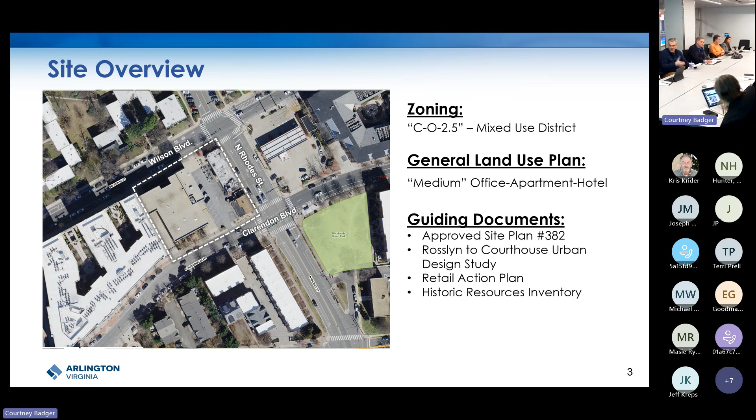Currently, the site is developed with an office building and 2 restaurants: Il Radicchio, in the bottom right-hand corner of the screen, and Roadside Grill, in the bottom left-hand corner. It's adjacent to a 6-story residential building. There's an alley that runs between that residential building and the office building that's proposed to remain, providing access to an underground parking garage and loading areas, which are also proposed to remain and provide support for the proposed building.

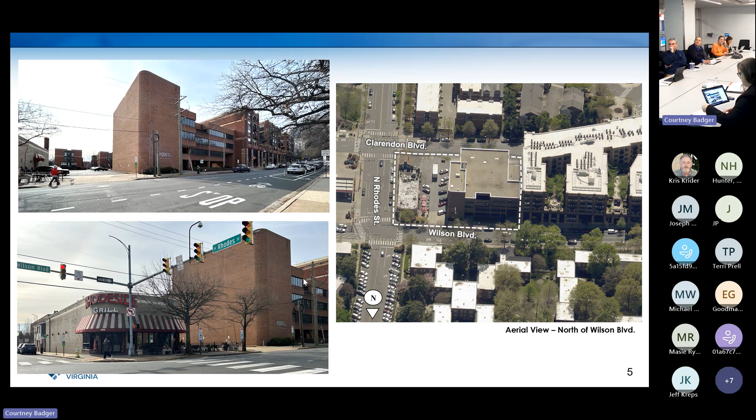This site is within the Rosslyn to Courthouse Urban Design Study area, which is the guiding planning policy document for the site, and I'll reference it throughout the presentation. Roadside Grill and Il Radicchio restaurants are listed on the county's historic resource inventory as notable and minor, respectively.

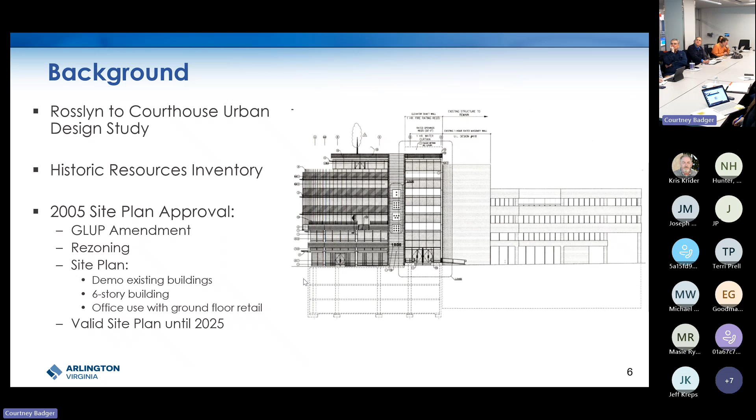In 2005, the county board approved a GLUP amendment and rezoning site plan to redevelop this site, seen in elevation here, with a 6-story office building, which included the demolition of Roadside Grill and Il Radicchio restaurants. That site plan approval is still valid. If the proposal that we talk about tonight is approved, it would supersede that site plan approval.

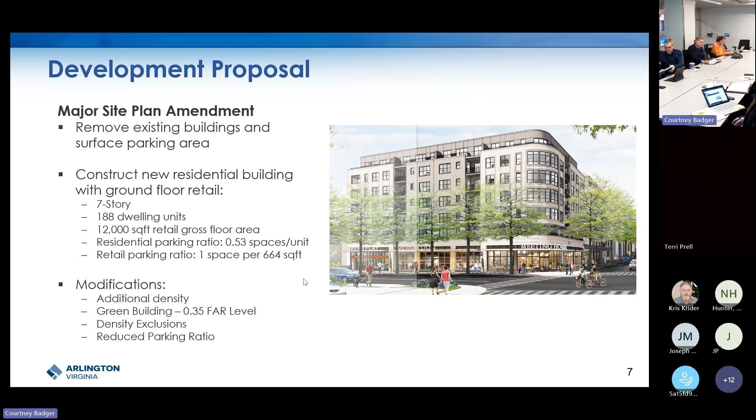So the applicant is proposing to amend that site plan to demo the 3 buildings on the site and construct a new 7-story residential building containing 188 residential units and approximately 12,000 square feet of retail gross floor area on the ground floor.

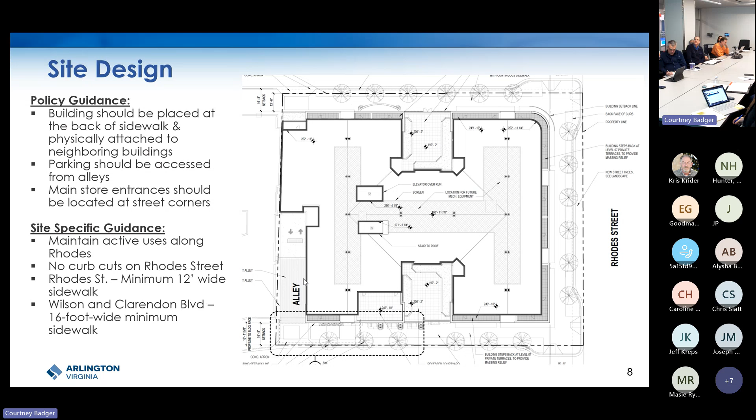It has a protected pedestrian walkway, which is called for in the design study. Active uses line Rhodes Street with retail and retail-equivalent uses along Wilson and Clarendon Boulevards, in line with the Arlington Retail Action Plan. There's entrances at the corners of the buildings, which is specifically called for in the urban design study.

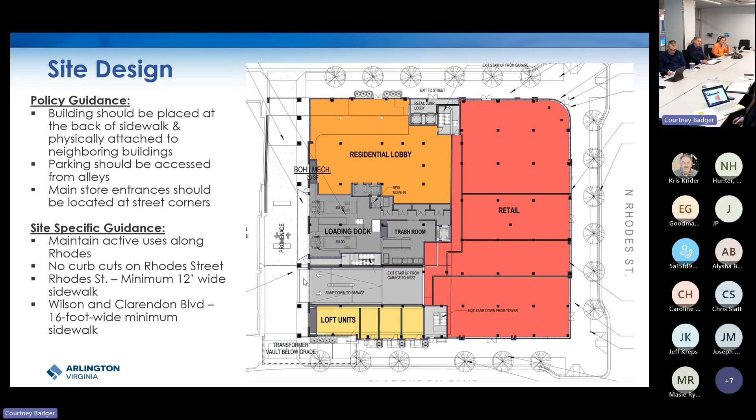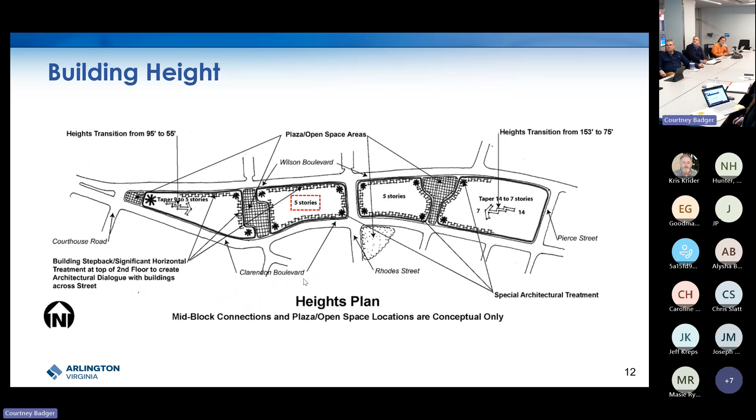The Rosslyn to Courthouse Urban Design Study also has height recommendations for this corridor. This block and the block to the east are identified to have a recommended height of 5 stories. The current approval active on the site allows for a 6-story height, and the applicant's proposal now requests a 7-story height. So although the urban design study recommends 5-story height, the zoning district allows up to 16 stories.

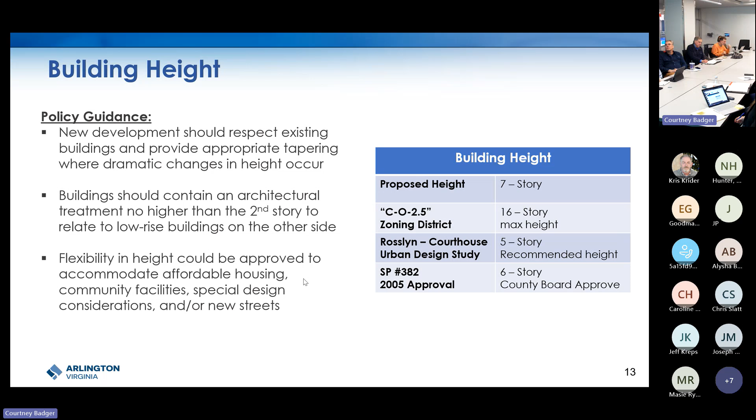Additionally, the urban design study states that buildings should respect existing buildings and provide an architectural treatment at the 2nd floor to relate to adjacent buildings. It does specifically call out that height flexibility is available, particularly for projects that have affordable housing, community facilities, or other special design considerations.

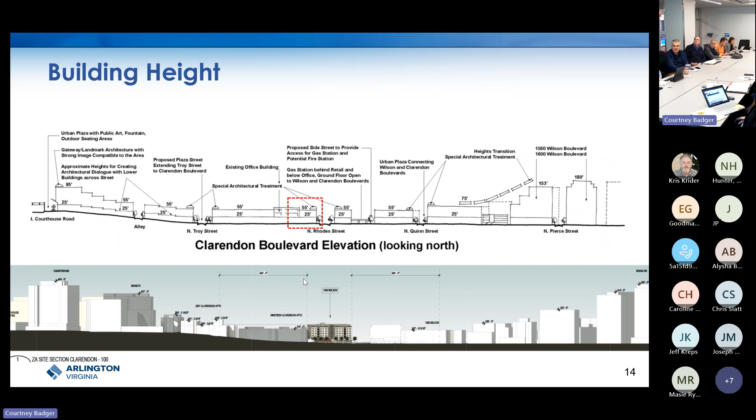Here's another view of that height profile outlined in the plan. The urban design study envisions, for lack of a better term, a bowl-like elevation, where the higher heights are on the east and west of this section, then it tapers down to the bottom of the bowl, which would be this site and the block to the east, being the lowest elevation. In the bottom view, you can see how the applicant's proposal falls into that view—this is looking at Clarendon, looking at the site.

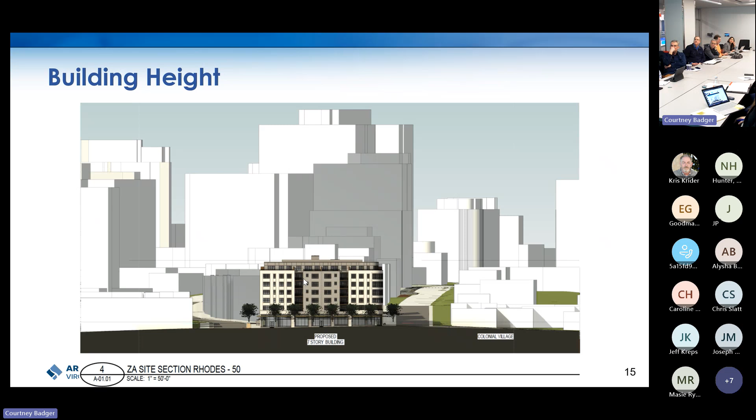And here's a proposed development look from Rhodes Street, looking from North Rhodes Street at the site. You have Colonial Village on the right-hand side, and the Brompton on the left.

I'll talk briefly here, though the applicant will go into more depth on the architecture. You can see some renderings. The urban design study recommends an architectural feature on the corner, and the applicant is proposing a rounded corner to fulfill that and pay homage to the Rhodeside Grill. They also have a carve out at the 2nd floor and courtyards on Wilson Boulevard and Clarendon Boulevard to break up the massing of the building.

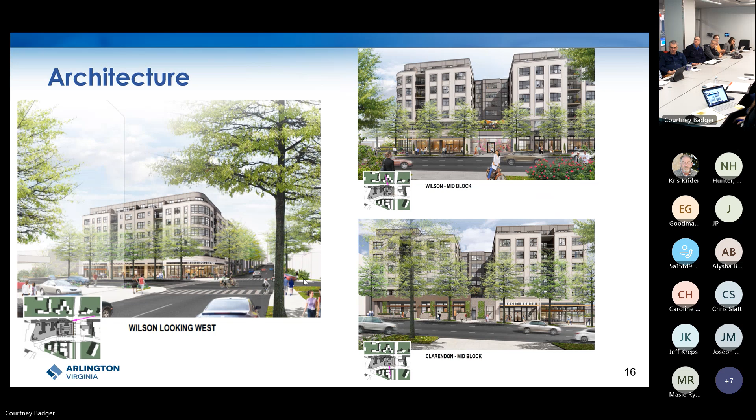Just a couple numbers on landscaping: the proposed tree canopy is 16% coverage. The 5 trees currently on site are proposed to be replaced with 18 new street trees along Wilson and Clarendon, and 15 other trees are proposed to be planted at the 2nd floor courtyards on both the Wilson and Clarendon sides.

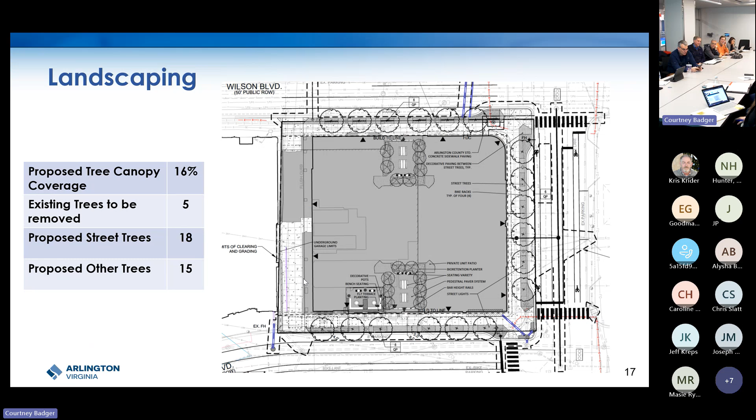To give an overview of where we're at in the process, we're at the first SPRC meeting. There'll be a second SPRC meeting in April before we go to commission meetings, including Transportation, Planning Commission, and possibly Housing Commission, and then on to the county board. So with that, I'll stop my presentation and we'll hear another presentation.

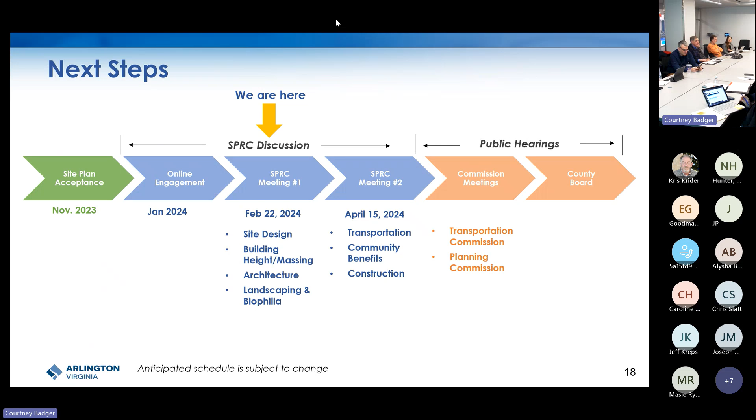My name is Andrew Painter with Walsh Colucci, good seeing you all here this evening and online. I'd like to provide a brief overview, then turn it over to George Chapisky, managing principal at Fortis, for introductory remarks from his company's perspective. Then Alysha and Jeff Kreps will walk through the architecture and the biophilic elements of the project.

This site was originally approved back in 2005, as Courtney mentioned, to serve as a new headquarters for the National Science Teaching Association. We all know what has happened to the office market since then, and NSTA's office needs have clearly decreased—the organization no longer needs a new headquarters building. Fortis purchased the site outright last year and immediately began thinking about a new vision for the property.

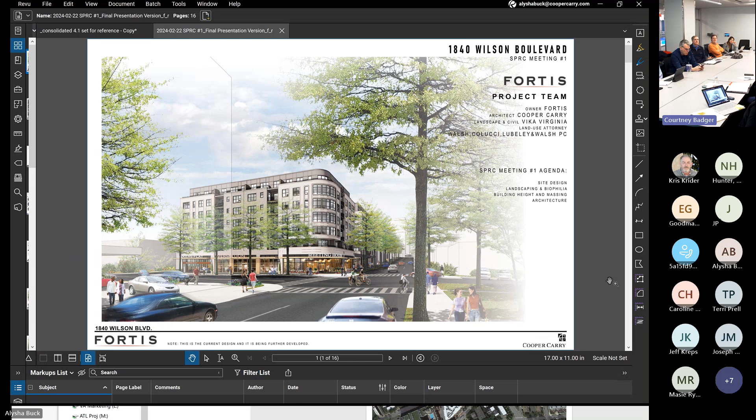Over the last 10 months or so, we've developed design drivers for this, which will come out in Alysha's presentation and our discussion. The first design driver was to increase the county's housing supply, especially between Wilson Boulevard and Clarendon Boulevard, recognizing that it's a transit-rich environment.

The second design driver is to complete the urban design intent of the county's policies in terms of streetscape and architecture on the site. The third is to deliver ground floor retail and restaurant opportunities that were approved and originally envisioned with the 2005 approval—and the Rosslyn Courthouse Urban Design Study really calls for this to be an activity center and social node. Last but not least is to create a physical meeting place between the Courthouse and Rosslyn neighborhoods.

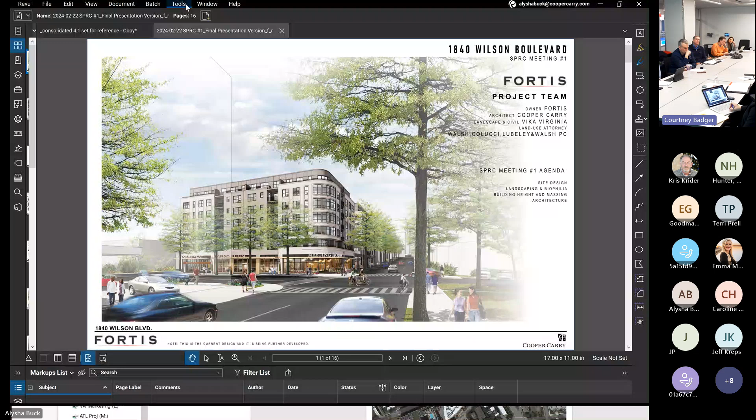This is sort of in a trough, but we're equidistant between the two metro stations and between the two neighborhoods. We filed our application back in May of 2023, and as Courtney mentioned, we were accepted for processing formally in November of 2023. Before filing, though, we went through a conceptual site plan—something the county offers to get an early read on things like land use, transportation, setting the ground plane, and policies.

Several staff members here tonight and online participated in that, and it was a very beneficial process for what we eventually filed, setting clear expectations for a variety of things—we're very grateful for that. We've had a couple of meetings with Rayfom, met with representatives of the Colonial Village community, and reached out to meet with the Bromptons as well. We're happy to see representatives of our neighbors here tonight too.

So George—yeah, thank you, Andrew. Again, my name is George Chapipsky. I'm president of Fortis Companies, an investment development company focused on projects throughout the DMV. We've currently got a project over at Potomac Yard that we're completing, 140 units.

We have another project we're taking through the 4.1 here in Arlington, just a couple of blocks away on Fairfax Drive. We've got another one we're finishing up down at the ballpark across from National Stadium. This site is obviously an important corner. It's been long underutilized, and I feel like we brought together an exciting team here to help realize this block.

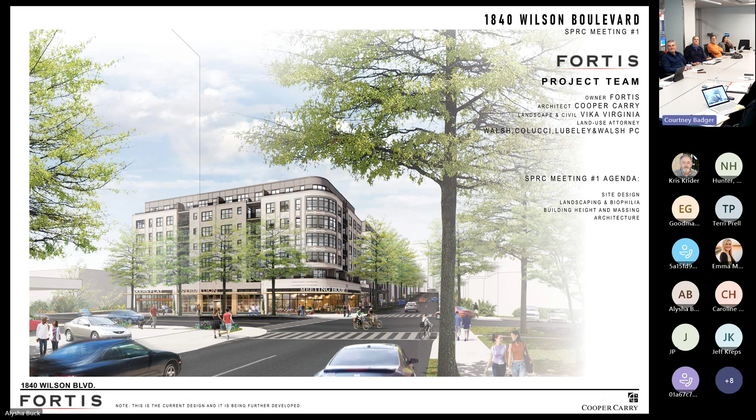Alright, so I'm Alysha Buck, an associate principal with Cooper Carry. We are the architects on the job, and I will be the project manager for the project moving forward. So I don't want to be too redundant to what Courtney spoke to earlier, and I know we're on a pretty concise timeline here today. Let's dive right in.

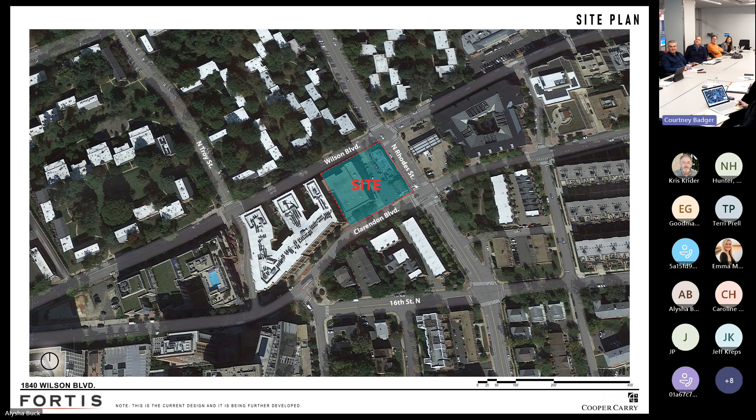We're already refamiliarized with the site right between the courthouse neighborhood and the Rosslyn neighborhood. Looking at the site design, there were several high priority items. Number one, providing active uses along all three sides, all three street fronts. You can see at the top left our residential lobby, a good segment of retail that wraps both corners along Rhodes Street, and then the loft units down at the bottom left.

Another high priority in the site design is improving the pedestrian environment. The first move we've made is reducing the number of vehicular curb cuts out there today. There are 5 curb cuts, and we're taking that down to 2, streamlining vehicular access but also providing continuous sidewalks along Rhodes and Clarendon, which is a big improvement over conditions today. In addition, we're widening all the sidewalks, providing 16 feet 8 on all 3 sides, and introducing new street trees for a continuous green environment around the site.

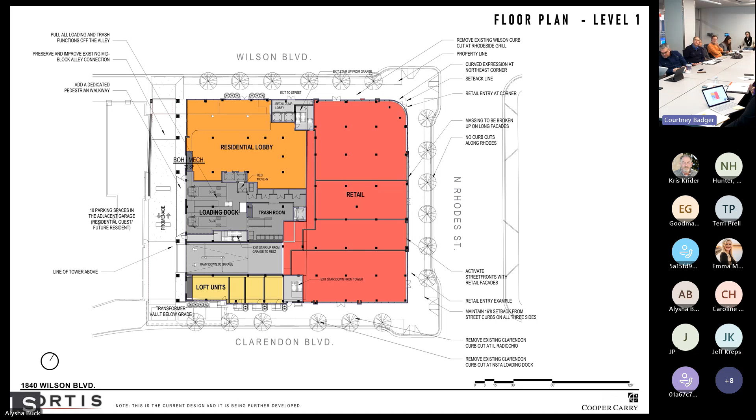Our final high priority item at the site design level is improving vehicular traffic. We're maintaining the existing alley, which gives access down into the existing below grade garage. We're preserving that below grade garage - I think that's important both from a sustainability aspect and for improving the timeline for construction. That's going to save us a good chunk of time in the building. Additionally, off of the alley we have all our back of house function for vehicles. You can see right in the middle of the building we have our loading dock and trash. Trucks will be able to pull not only off the street but fully off the alley and into the footprint of the building, totally out of the way, leaving the surrounding areas free for vehicular traffic.

And now I'll hand it off quickly to Jeff Kreps with VIKA to speak to biophilia.

Thanks, Alysha. This is Jeff Kreps, I'm the Director of Landscape Architecture at VIKA, and I'm here representing both the civil engineering and landscape architecture components. Briefly, I just want to talk about the biophilic elements as defined in the upper left-hand corner, so we're all on the same page. Biophilia is the innate tendency for humans to want to be closer to natural elements. So on this urban site, our goal is to introduce, to the extent that we can, those natural elements.

Primarily we're talking about the ground plane for the public, right? That's the piece you're going to be seeing, but also for the residents of the building who will be interacting with the courtyards up above, the two primary ones you see, as well as the amenity terrace on the upper level. So briefly, we are exceeding the canopy goals for the site with the trees we're putting in, and we are exceeding the tree replacement requirement, which is a good thing and it's a challenge.

We want the street trees to be the primary component of the ground plane, providing an edge, both a physical and a visual barrier between those folks on the sidewalk and the automobile traffic passing by in the street. It helps soften that edge. It also, at maturity, provides an overhead plane via the canopy, which can help again soften the urban edge and make a more pleasing environment for folks to be moving through.

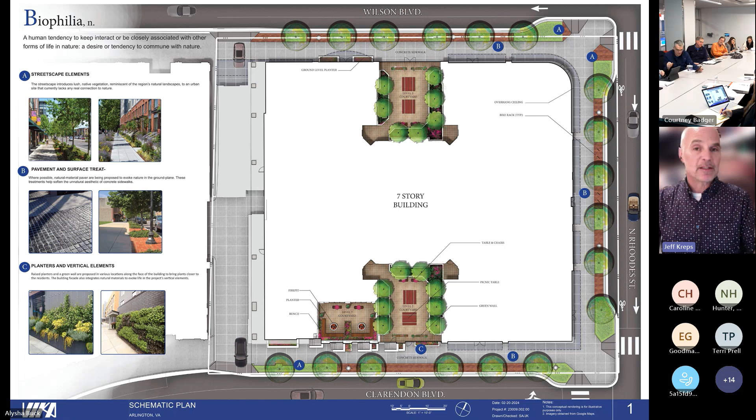In addition, at the ground plane, where we're able to - not within the primary clear sidewalk, but in the areas between the tree pits - we can introduce other materials: more natural stone, paving stone, brick, sometimes even cobblestone pavers, those kinds of things at the ground plane to introduce a textural change, as well as a visual separation from the standard concrete.

Those things begin to add up. And lastly, on the south side, the Clarendon side, we've been working with Cooper Carry to introduce green walls, which bring a vertical element on the building side. You'll have the outboard side with standard tree pits and lushly planted ground plane with native plants, and on the building side, with the southern exposure on Clarendon, we have the opportunity to introduce green wall elements, which will further soften the urban experience and introduce natural elements.

Similarly, I won't go into the details, but you can see on the screen that's also what we're attempting to do with the courtyard, similar materiality and lush planting for those small courtyards. So that's what I have to say about biophilia.

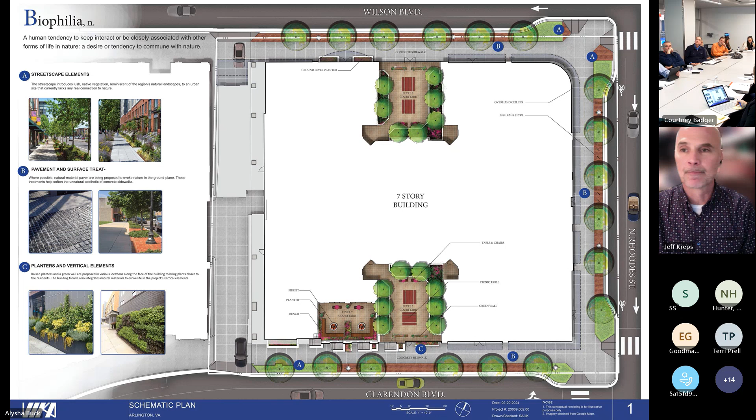Thanks, Jeff. Now we're going to speak a little bit about the building height and massing, and then we'll move into some of the renderings and talk more about the architectural design.

You can see here the site sections we've cut. We feel it's very important to relate to our context, the existing buildings in the vicinity. The taller buildings in Courthouse on one side, the taller buildings in Rosslyn on the other. We're at the bottom of the bowl in the middle, and we want to provide that transition down from those taller neighborhoods.

On the bottom, this is a section cut along Rhodes Street looking to the west. You can see the taller buildings of Courthouse in the background, showing how we are stepping down as you transition down the blocks.

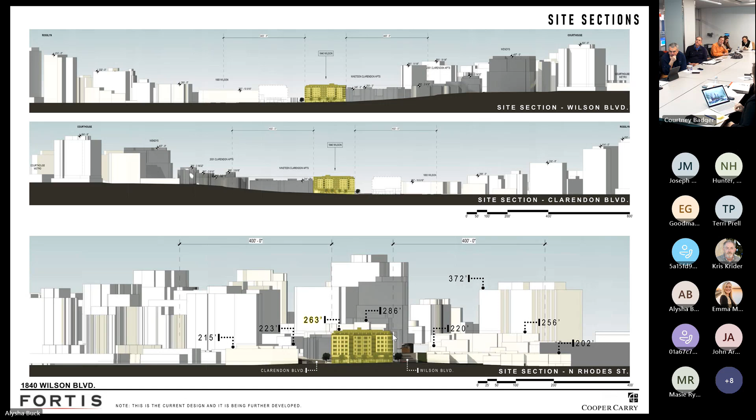A lot of what we're doing with the design here is really meant to break it down. We don't want to just plop a heavy solid box on the site, so we're making several moves to adjust the scale and make it feel more friendly.

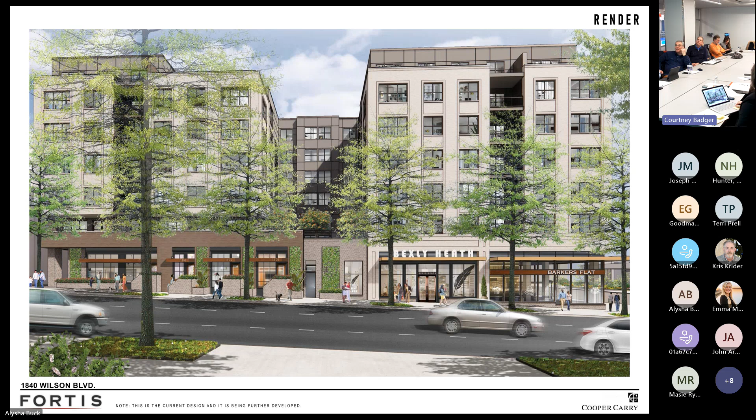Here at the southeast corner, you can see our expression through the majority of the building is very rectilinear. We're doing that intentionally to contrast with what we think is the most important corner, which you'll see here in a little bit. This side is very rectilinear with sharp corners.

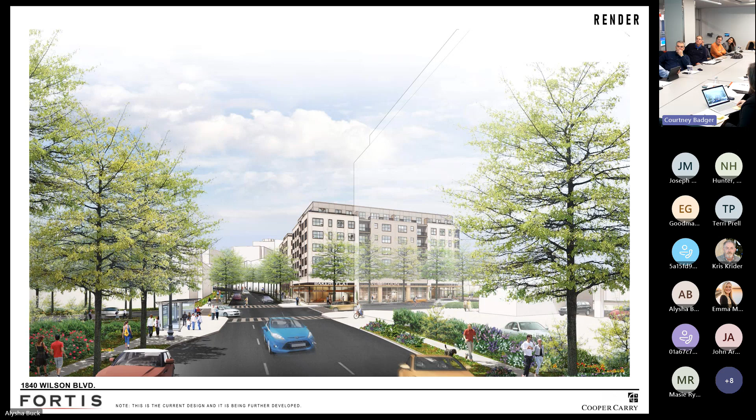Okay, now swinging around to the opposite side of the building, this is the north side on Wilson. You can see here where the other end of the alley is popping through. We'll have vehicular access as well as a dedicated pedestrian zone.

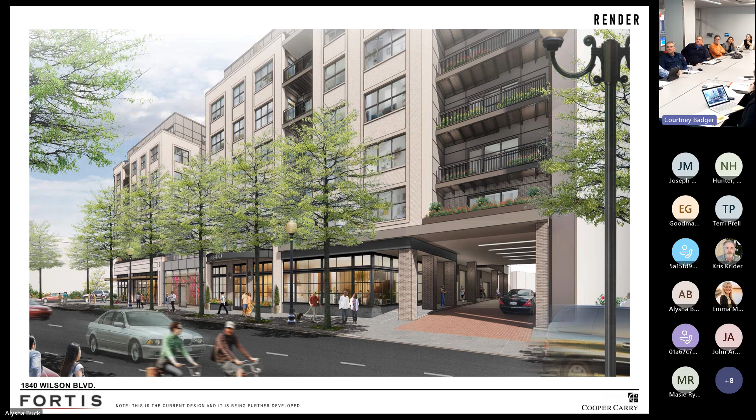This is going to provide really key porosity into the long length of our city block here. It'll be a good shortcut for folks navigating the neighborhood. We are looking to improve the alley with that dedicated pedestrian zone, built up on a curb so that folks on foot will have their own safe zone to traverse the alley. It's also protected by these columns that sit between the vehicular zone and the pedestrian zone.

Oh, hi, we do need to keep it moving. Okay, thank you, all right. No problem. Beautiful renderings.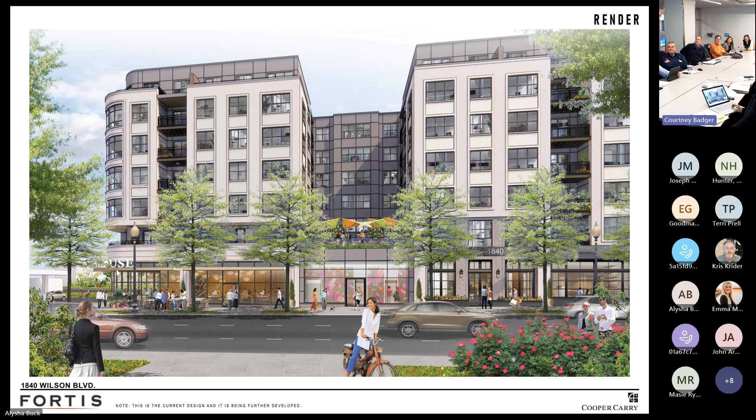This really is a nod to the existing roadside grill building, where we've introduced the curve and carried that curve all the way up the full height of the facade.

And finally, here's what we're calling our 100% corner. This is going to be a really important retail environment. It's got very great visibility, both from a pedestrian approach and from your vehicular approach, with Wilson coming right at the corner. In addition to the curve, we're also introducing some of the color palette that's on the existing building, the Roadside Grill building, as well as introducing this horizontal element at the top of level 1. This is going to mimic the height and shape of the building that's out there today.

All right, so I think that covers all the hot topics, and I'll hand it back to Courtney and Sarah.

Thank you. Hi, I'm Sarah Steinberger. I'm actually chairing this, though you would not have known that by my late arrival, and I apologize. Childcare has been traveling, you know, the usual.

Okay, so first thing I'd like to offer is if there are any clarifying questions for those members of the SPRC. Just to clarify what a clarifying question is: it's a question that is not a substantive question, it's not feedback, it's not a discussion like 'I want to hear more about X.' It's more like 'did you say the building would have this many stories?' That kind of thing. So do we have any clarifying questions around the table?

I've seen at least one. Just, I think I heard something about the garage and the alley. Can you just go over it quickly on how much of that is remaining versus how much is new? Sure, it's as though you take the level of the ground at the sidewalk and draw a line straight across. Everything below grade is going to remain. Everything above grade will be demolished.

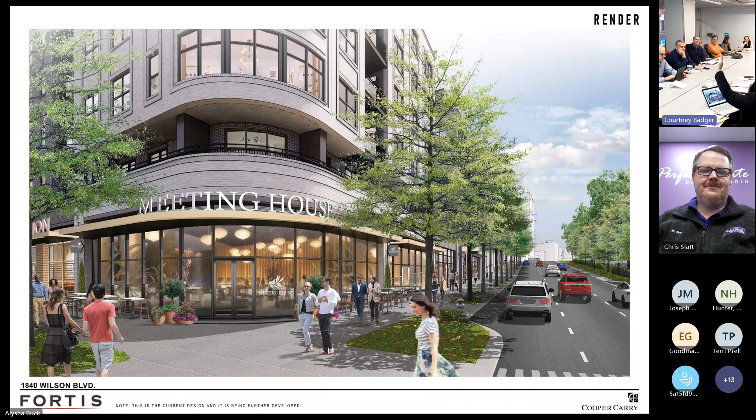So we do have, in that 16 foot 8 inch dimension from the curb to the face of the building, portions of that are for the street trees, portions of that is clear walking sidewalk width, and then there is an area in that zone as well for outdoor seating.

I'm going to have some hands raised. Yeah, I was about to say, I'm going to go to the virtual people. So Commissioner Slatt, you're up first.

Thank you. Can staff just remind me if the urban design study that was referenced multiple times in the staff presentation is county board adopted planning guidance or just staff guidance? It is county board adopted, I believe in the year 2000, 2004, somewhere around 2003, somewhere in that era. Appreciate it.

I see another virtual hand. Terri Prell.

I wanted to know, we have the protected walkway, but doesn't it pass right in front of the loading zone? And what happens to pedestrians at that location? You're right, it does pass in front of the loading zone. I think in order for pedestrians to traverse north-south while also maintaining vehicular access, they're going to have to cross paths at some point, not unlike how a pedestrian walking down the sidewalk would walk across a curb cut. So unfortunately, that is just one of the locations where that crossing traffic is going to take place.

Will there be some kind of lever or something so trucks or things stop before they proceed forward into the area where pedestrians would be walking? You know, we have not talked about a lever. No, we're getting outside of clarifying questions. I'm sorry. Okay, no, that's okay. But transportation is on the next meeting's agenda, so I hope you'll come back for the sequel. Okay.

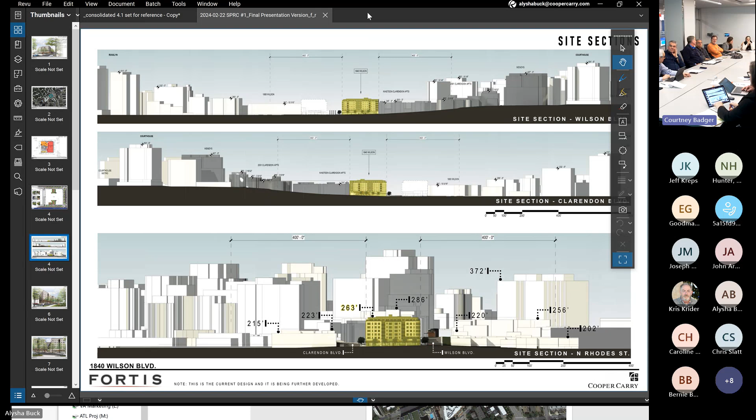I appreciate it. Yep, so we're interested in parking spaces, is that appropriate to address here? No, let's handle that in transportation, and so that would be for the next topic. Okay, so I'm sensing we're wrapped up with clarifying questions at this point, and I don't see any hands, although people with better eyesight than me can tell me otherwise. Okay, so the first topic for the agenda tonight, we have 4 topics, is site design.

The other topics people may want to comment on are building height and massing, architecture, and landscaping and biophilia. My experience is that building height, massing, architecture, and site design all blend together, so I'm inclined to let those three topics hit the floor together, while landscaping and biophilia will be a standalone topic since it's more distinct. So from the perspective of site design, building height and massing, and architecture, does anyone have questions or feedback on those topics?

Talking about the building setback from the curb, I live across the street so I went out and did some measurements. The current NSTA building, which is going away, is 35.5 feet back from the curb, with lots of trees and transformer covers. On our side of the street, we're 27.5 feet back. Your immediate neighbor up the hill at 1919 is 21 feet. Your plans show a setback of 16 feet 8, but the steps are actually 12 feet 3 from the curb, so the effective setback on Clarendon Boulevard is about half what your neighbor up the hill has.

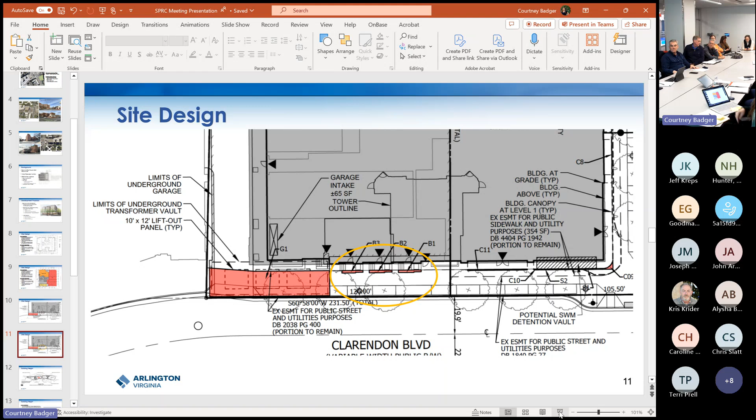I'll pull up this one that highlights it, relative to where the tree pits are. There's a small bit of overlap here, where the tree wells overlap one of the stoops, and another overlap here. Those tree wells are 5 feet wide, correct? So really you're talking about a sidewalk that's roughly 7 feet wide at that point — 7 feet 9 inches clear between the top side of the tree pit and the front face of the stoop, since those steps are effectively not sidewalk. I know technically the building is offset, but you're not going to have foot traffic through there, so the sidewalk is effectively 7 feet 9 inches wide, but only in those specific areas — there are 4 of those areas. Agreed, but it's still effective. I didn't think you guys — are we going to change the design?

But I want to point that out. I think that's significant, I really do. Now, the steps for the 2-bedroom loft, which is kind of covered up - I know this image is meant to emphasize the transformer grates. How far, that also sticks out, if I'm not mistaken. It can't really be shown in this particular diagram, though. So that position is correct.

The front face of the building actually does jog a little bit. You can barely make out the trace of it there. So that's also going to be less than, certainly much less than 16 feet 8 inches, and less than, again, my measurement was 12 foot 3 from the curb, less the 5 feet for the trees, but those numbers are probably not correct. I was guesstimating off the drawings that I had available.

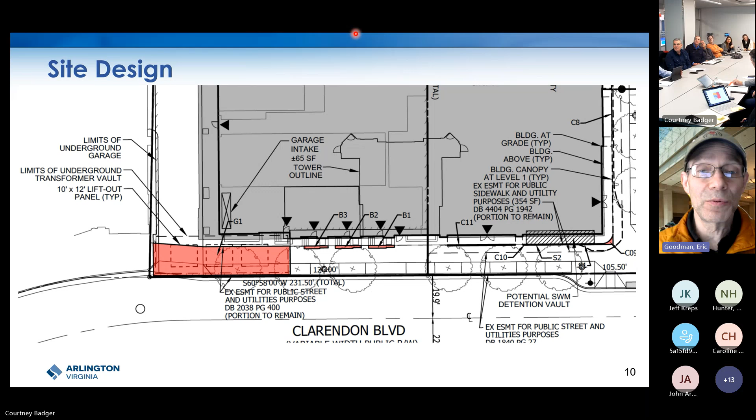Thank you, and I appreciate the discussion about the sidewalk in that area. I just want to know how that compares with the current situation that's there. Are we constraining that sidewalk more than what's currently there along that section? So there is, out there today, the building face is one thing, but the clear walking width is a different story.

On Clarendon, where the existing loading dock and that curb cut come out, and then there's also the curb cut for the parking for the 2 restaurants, there is a pinch point there. I don't have a measurement on it, but it is very, very pinched and single file. Keep in mind, we've got a rhythm of street trees that we're adding - I think there's 18 street trees as opposed to the 5 that are in today. So those beds will start to pinch some of that down as well.

We're still following all the requirements that are there in the small area plan. You've got some pinches at 2 in particular of the stoops - one of those is only, is it 2'10" long area? It's a stride that we're pinching below the required 8 feet, I believe, between the tree pit and the face of a building. So it's minimal. I understand all the points you're making. We're trying to follow what's in the small area plan and standards that are there. And you're welcome, because all this is on our property - see all that nice green in your image? That's ours. Beautiful. So we look forward to adding to it.

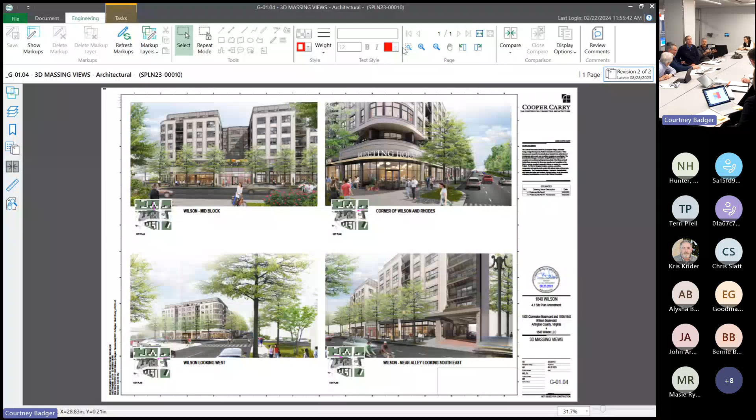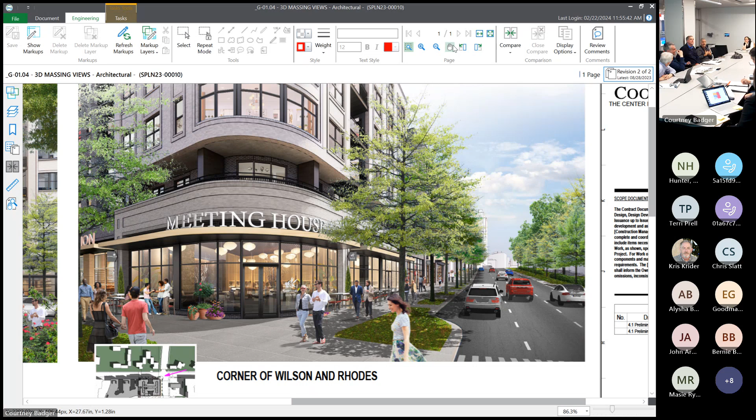I think it's really important that you have that there, and it's very important that you replicate the look of the existing Rhodeside building, to the extent you can make it as close as possible. Not having that brick wall along the street, but having plaster, is a good change. But the expression of where the bricks go and the detailing of the brick, if that can be replicated with the same material, because my view of that corner has always been sort of the landmark driving up to the courthouse. It's one thing you notice, it's very distinct. And I'd like to keep that personally, because it tells you where you are.

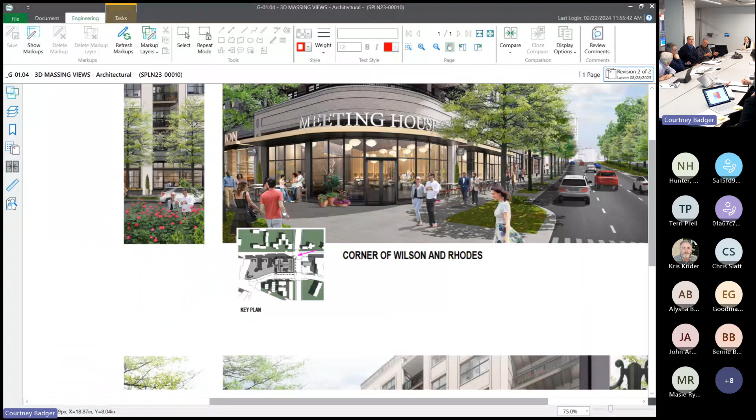It's so you know when you're moving up, it's not an anonymous thing. I've always noticed it. And the more we can keep it looking that way, the better. I think we're most of the way there, if not completely. There's some smaller detail with the glass box used in there, two ways wide around on the outside. If you could put that back in somehow, again.

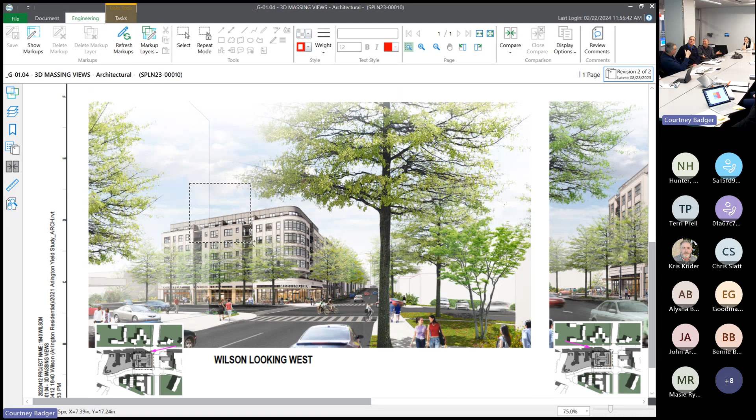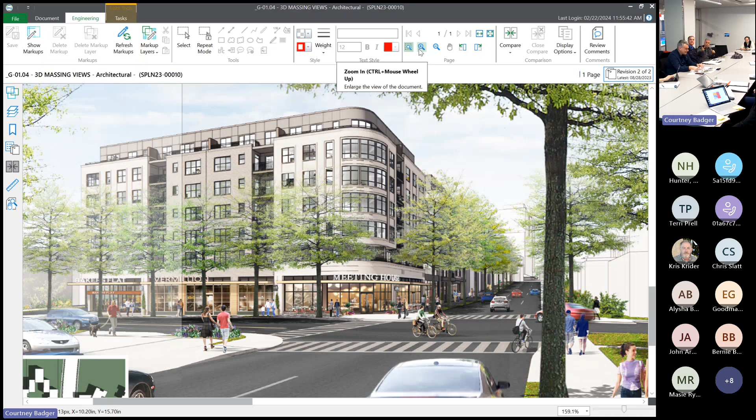And the glass, the way the glass, brick and the other materials work together, I think it really is significant. And that's why I'm very happy with the corner, the way you're doing it, because that is the architectural feature. And it works for me.

The general massing, I think, is good. I like the courtyards, recessed balconies, it breaks it up very nicely. The window expressions, I think, work well, they have that sort of semi-industrial look. So I think it's a sophisticated building that is good for this site here. Yet it's not anonymous.

Overall, I'm happy with it. On the stoops discussion, generally I love having stoops. I think we raised some good points as to the pinch point, if it can be recessed back a little bit, even if that means you have an overhang. I have no problem with overhangs, I think in many ways they work brilliantly for streetscape. So if you could push that first level in a little bit to capture that wall space, but leave above it as is, you'd lose a few square feet for each of those three units. But I would see that as a very acceptable solution, because I do like having the entrances to those units right off the street. Yeah, it's great, we have that in a lot of areas.

The more we can do, the better. So anyway, that's my opinions on architecture.

Before I go to Commissioner Slatt, I understand staff has some feedback with regards to the stoops and whatnot. So, just Sergio.

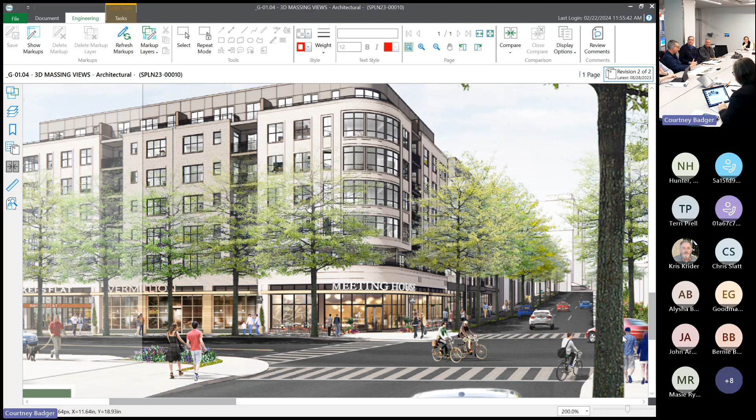Well, we have stoops on our side, but we also have a 27-foot setback on our side, so there's a difference. I think another thing with regards to the stoop expansion just referenced, with pumpkins and trellises, whatever, is something that can also be addressed in resident codes and rules for the building, so maybe that's not allowed. That's beyond the scope of the SPRC here, but it might be something we give as feedback when it comes to orienting people to a particular building, things they can and cannot do, what's safe, and so on. So that's something to consider too.

Mr. Slatt: Thank you. I'll just go down my list. I think it might be repeating some of what my fellow commissioners mentioned, but I think it's good to see a building that doesn't try too hard, and I mean that as a compliment. It's just a building, it's there, it's in the corner, it's doing its thing, it's got its windows, it's got its walls.

I would encourage the windows to be a little smaller, not from any aesthetic concern, just from an environmental energy consumption concern. But right now, I think it's really nice proportion. I think some of the breaking up of the mass is nice. I'm not sure that it's needed, but I think it's still nice.

I think it's not a big enough building that you were running the risk of being like a run-on sentence, right? It's a small enough building that it can hold its own proportion. But anyway, the solid versus the void and the rhythm is really nice. I think the feature on the corner is really nice also.

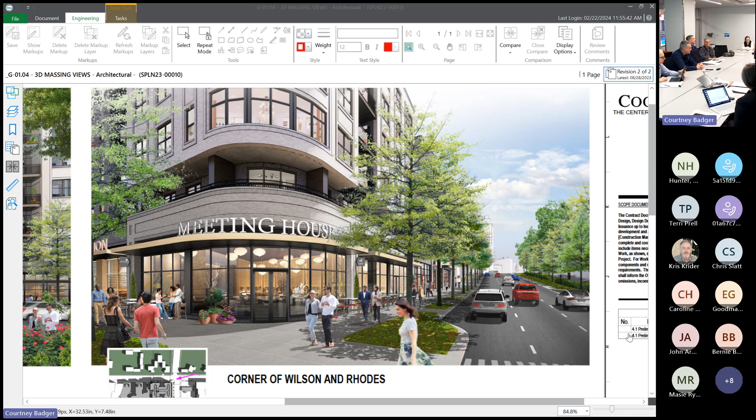I think the concern with the height—we're sort of both blessed and plagued by this 2+5 code allowance since it came online a few years ago. So no fear of the Exxon site being any taller than 7 stories.

I promise you it's not going to go taller than that, because it's probably going to have the same exact construction, which is the 2-story podium and the 5-story stick built. I think that's a little taller than what some of the community and the previous plan called for, but taking Commissioner Guevara's concern about reaching a sweet spot in the density, I'm fairly comfortable with the 2+5 on this situation, total 7.

I think the other thing is just to preempt Commissioner McIntyre—electrification, no gas. If you can do it in the building, that would be most brilliant. Yeah, gonna bring that up. I think that topic is covered at the next SPRC. Sorry, that's foreshadowing—there's a list. Letting y'all know, so we don't go down the rabbit hole.

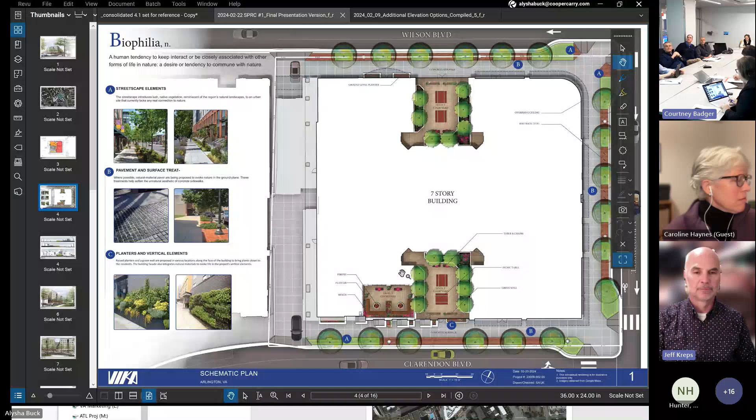That's the 7th floor terrace, which will be landscaped. So just that corner, not the rest of the 7th floor. Correct. Here we go, right. Okay, so this is the view from above looking down, so you see all the levels of courtyards, but this piece here is up at level 7.

Okay, not enough room for dogs, clearly. Okay.

Great, and again, kudos to you on the green walls and tree canopy. That's great that you're getting so many trees in there. That'll make a big difference in that area. So thank you.

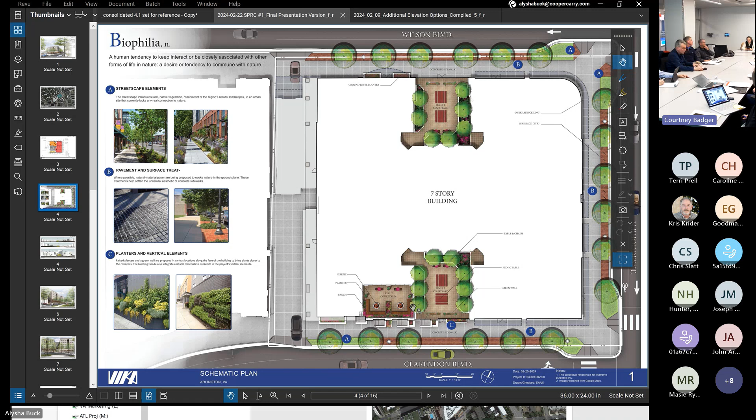I'm going to pile on with the dogs. I'm concerned since Brompton also bumps up against that park on the corner. So having somewhere where the dogs can relieve themselves, not on the trees but also not in the park, because a lot of children play in there, that would be very helpful. We would want to deter that from being used.

Getting lots of feedback on where the puppies can't go, so... where they can. Poor puppies. I did bring my dog to the site tour for this project, for those of you who weren't there. Thank you, he doesn't always get that feedback. He's young, he's only 2, roughly 50 pounds. Oh really? I didn't know they could do that. Is there a size limit on dogs? Oh yeah, that's pretty standard, either a breed limit or a size limit I think. Because you could get like a Ridgeback or something in a 1 bedroom. Oh, I've seen it, I've seen it. I'd have to put my dog on a diet, he's coming in at 52 pounds. There you go, got a cat in that direction.

All right, anything else on landscaping and biophilia? We touched on that throughout even the earlier topic, so I think we've covered it. I'm not seeing any other hands. You can say something if you wish to be acknowledged. No, okay.

So we're going to go to... Well, I was just going to, oh. I just wanted to say one thing, that we also very much appreciate the green. That's all.

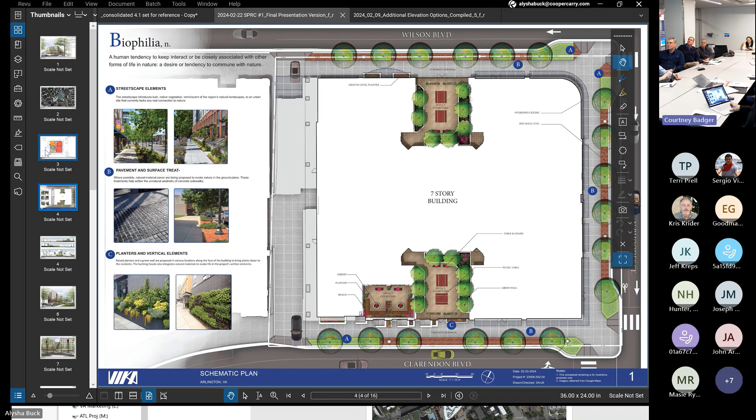What I'm getting at is by keeping the garage, that garage is just up in this zone here, and we're held by a wall that is literally the lid for where you're trying to dive down into the garage. That's a good image of it right there. Yes, perfect. So everything we take out of here, you can see even the offset of the building there, we're already kind of crunched. We can't get past this popped-up wall and the lid that's over the top of it. It's a challenge. This is a good drawing here, where that edge of the tree pit is and that edge of the stoop, there's only about 2'10", where we're diminished in the dimension of 8-foot clear that the county has as a minimum.

But it comes back to what you said, I mean those stairs are crazy narrow. Yeah, they're almost, according to this other image, the space there is 3 feet. This is the Clarendon Boulevard side. Right, so this is exactly the set you're talking about, the total width of those stairs, including the wall, is 3 feet. Yes, that's not a lot. And the 3'2" I'm talking about is clear inside the wall. Clear, from the inside of the stoop wall to the face of... No, okay, so agreed, that wall, the 6 or 8 inches, whatever that is, that encroaches on the width of the sidewalk naturally. Yeah, we just didn't want some concrete step, we wanted some level of character to it that was quality.

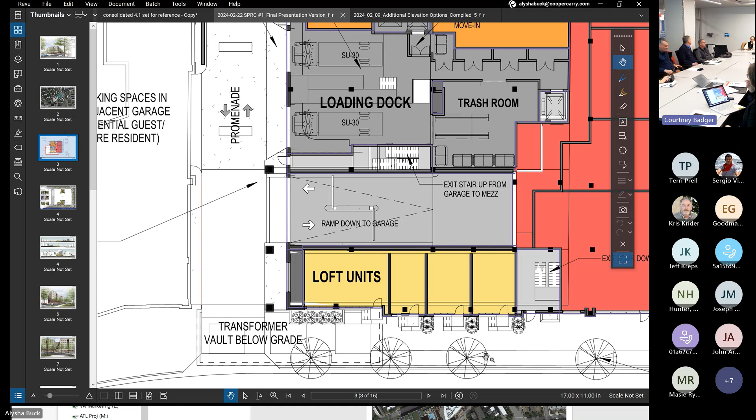Thank you. So, a kind of question about the parking garage—that might be a place to put the dog amenities. But my other question was also how many spaces versus the residents and the registrants?

That does get into transportation. Sorry, you had asked the dog thing, I was allowing it, but then we got more into it. Thank you—no, that's okay. Transportation coming soon, next meeting.

Okay, so let's go to some final comments. Anyone—if someone already said the thing and you just want to agree with that, we don't have to repeat everyone else's comments. I like a lot of the things that Leo said.

As I expressed, I'm concerned particularly for the plan—the integrity of the plan, precedents, and also the impact of additional height, because Colonial Village was also central to the plan. There's very much support for many of the concerns there.

Are you taking comments from the phone? I think the pet infrastructure is a really good idea, because we already have a lot of dogs coming across the street in Colonial Village because we have grass, and it's really tough to keep the lawns green. So anything done with pet infrastructure would be great.

I had a question on entertainment—do you want me to save that for later? Yes, save that. Doris, I heard you speaking up—yes, you can speak now. Okay, thank you.